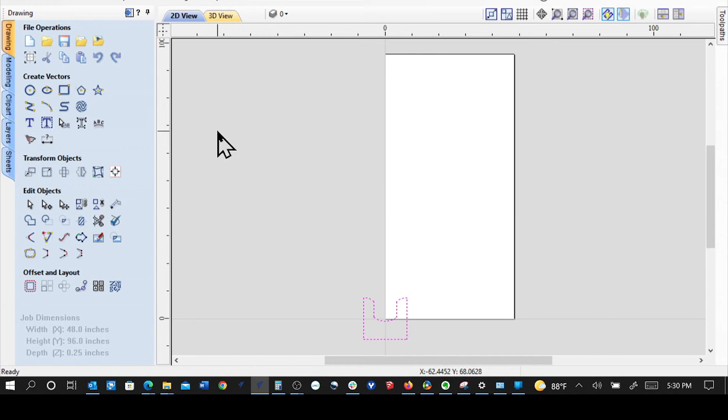Okay, I have a customer that just got his machine, and he imported some DXF parts. Now, these are kind of slip-in dividers, out of 1/4-inch material, and they're going to slide into a 3/4-inch box he's going to make with the SmartBench, with a series of 1/4-inch grooves to let these things slide in.

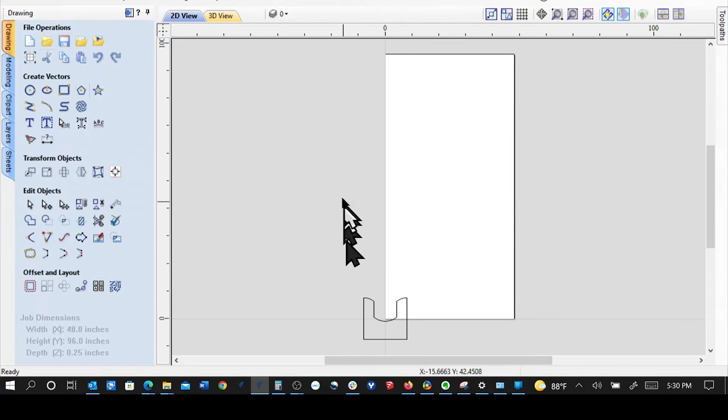So the issue he had is when they came in as a DXF, he couldn't cut them, because the lines are not all joined. The only way to really do that efficiently is to grab them all and go to the join command. Right now there's 8 different open vectors, and after we join them with this tolerance setting, there'll be only one, and that's what we want.

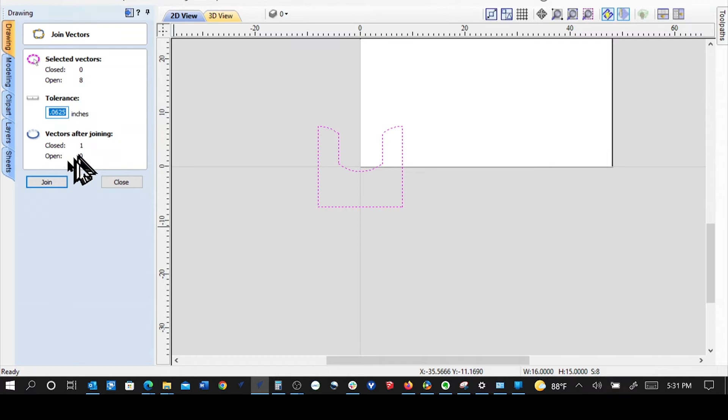Now anywhere I click on that, that's just one piece, so I can nest it. So his question was, how does he do his nesting too? We highlight it, come down here to the nesting icon, and go through our options. I'm assuming he may be using a 1/4-inch bit, but I'm not sure—it's 1/4-inch material. He could be using an 1/8-inch bit and going slow, just knocking it all out in one pass.

Typically what I do is I usually have a 1/2 inch, twice the diameter of the bit or more, so we may have a 1-inch clearance between parts and a border gap of 1.5 inches. That gives me room to screw this down onto my indexing jig that I use. There's a separate video on my YouTube channel—look up indexing jig—and that goes into that little MDF 1/2 inch plate at the end of the table, on one end, and the other end we can do the same thing into the panels.

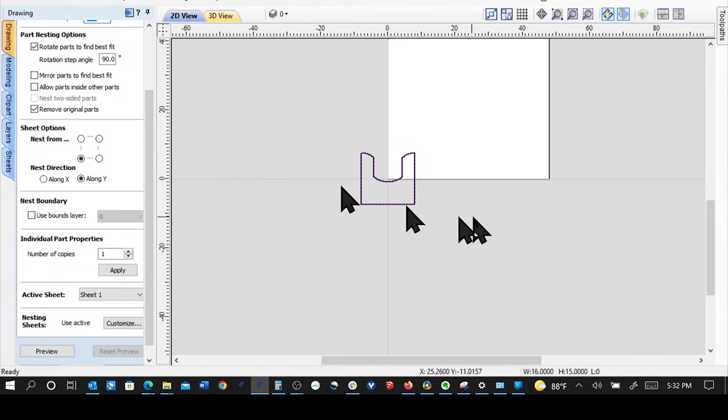So we highlight the part that we want to do, and we tell it how many parts we want to make. Say I want to make 20 of these—I don't know how many slots there were in the side pieces that we're going to look at in a minute. Then you apply it, and it puts that 20 there. If it doesn't put the number of parts there, you've done something wrong. So I'm going to nest and pack it from the bottom left-hand corner here, and I will preview it.

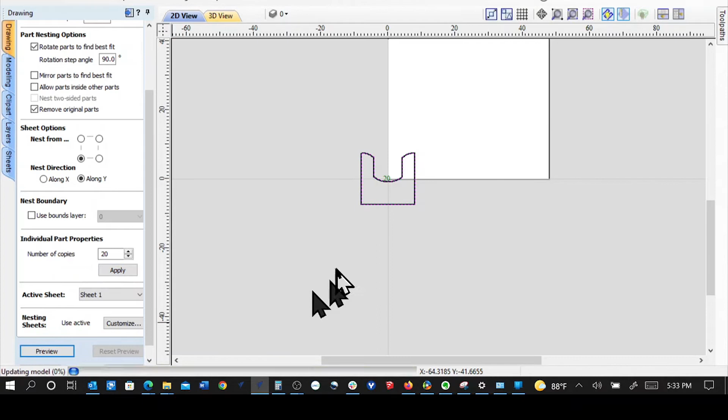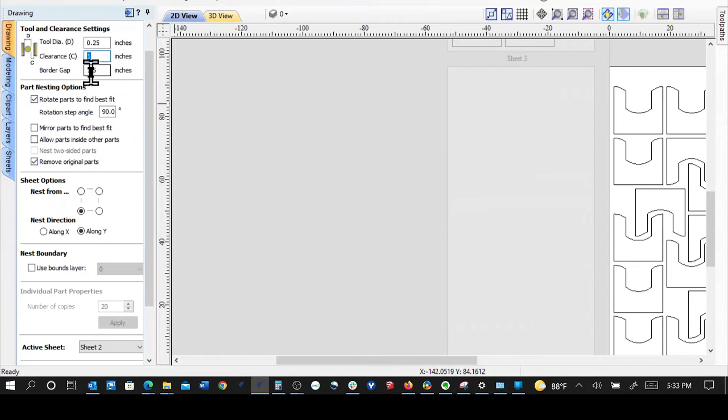So there we go: 1, 2, 3, 4, 5, 6, 7, 8, 9, 10, 11, 12, 13. Well, I think if I pack it a little better, I can probably get another one in, because it looks like it's going to be real close for getting another one up here. So if I change this clearance between parts to 0.5, let's see what that does.

I'm going to do Control Z, which would undo the nesting, but it now has everything selected. Control Z is just a typical undo command. You could also come up to the edit menu and do the undo.

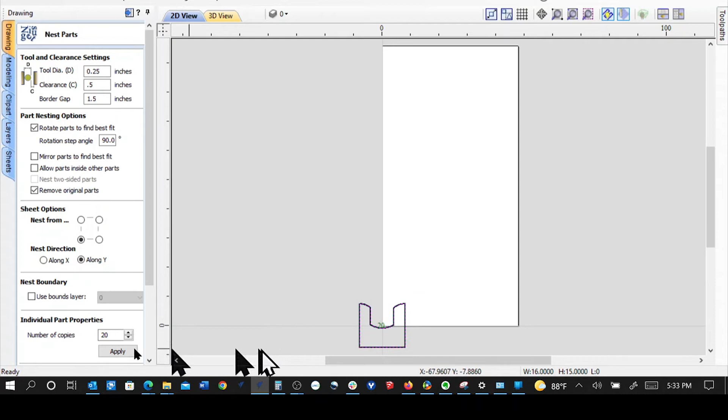So we're going to highlight this again. There's 20 of them that it's going to do, and with a 1/2 inch spacing between, if we preview the parts: 1, 2, 3, 4, 5, 6, 7, 8, 9, 10, 11, 12, 13, 14. So with the shape of this, you can't quite get the second one in there and have it straddle here to here—that's why these are dropped up and down a little bit.

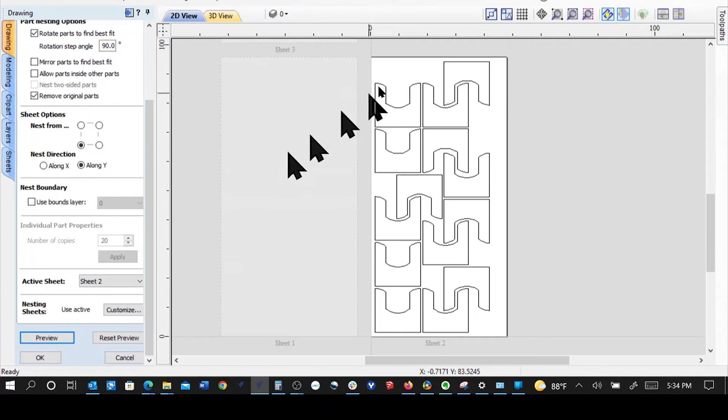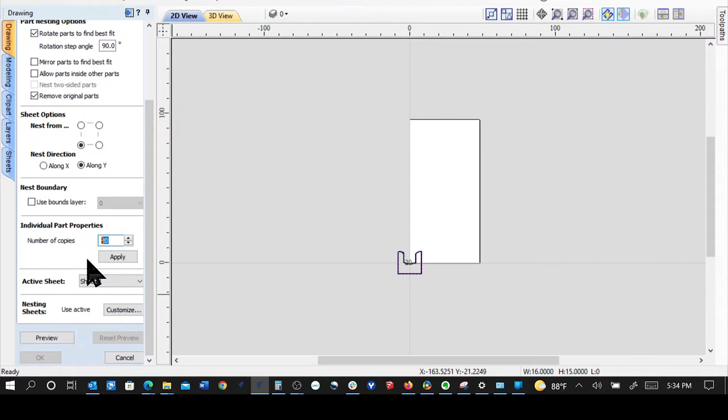I would now re-nest it, just tell it 14. I don't need this extra sheet with the carryovers of the 20 that I told it. So I'll do Control Z to unnest it again, and then this time I'm going to tell it only do 14. That way I'll just have one nice sheet done. And it's showing 14 units, and I'll preview. So there we are, ready to cut.

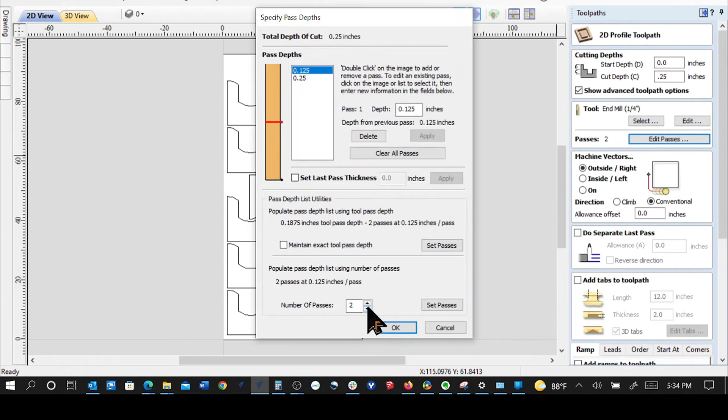Come on over, do the cutting path with the tool. I'm going to go 0.25 deep. Rather than do this in 2 passes, I'm going to do it in 1, just be aggressive, but I may slow my speed down some. I'm going to be on the outside of the path, do a separate last pass. How am I going to hold it? I'll do tabs, and you know how to edit tabs—we'll get into that in another video—and I would want to add ramps in and do that ramp over 3/4 of an inch or so.

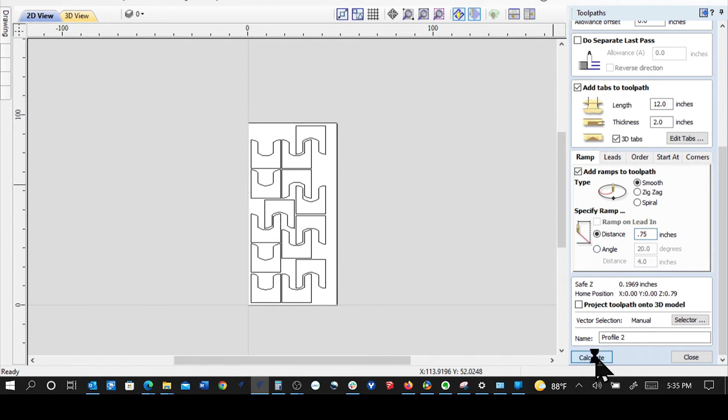We'll calculate. I didn't have anything selected, so grab everything - and no tabs are defined, that's fair, I didn't define any tabs. So there we go with the cutting. We'll reset the preview, preview all, and speed it up. And there's everything. If we have tabs, they would show up too, but we're going to bypass that for now.

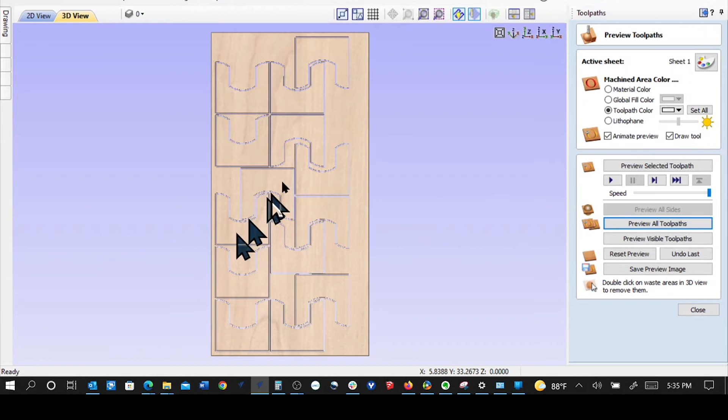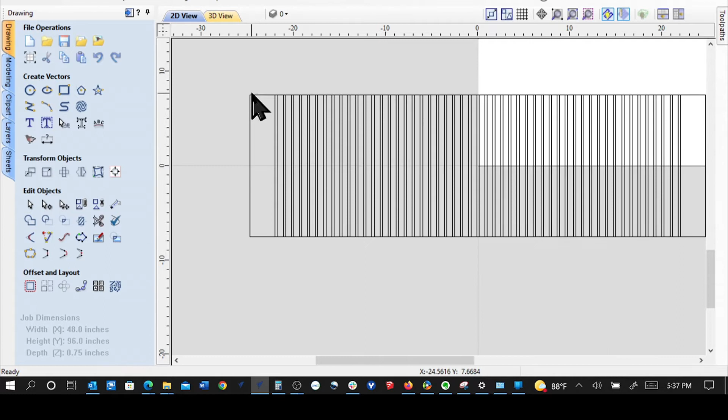The issue we had here is that this DXF he imported is disconnected. So if I wanted to pocket this out, I can't, because it's not a clean individual rectangle. However, I don't want to pocket it out - I want to make one pass with the bit, a 1/4 inch deep, to let those 1/4 inch plywood panels drop in.

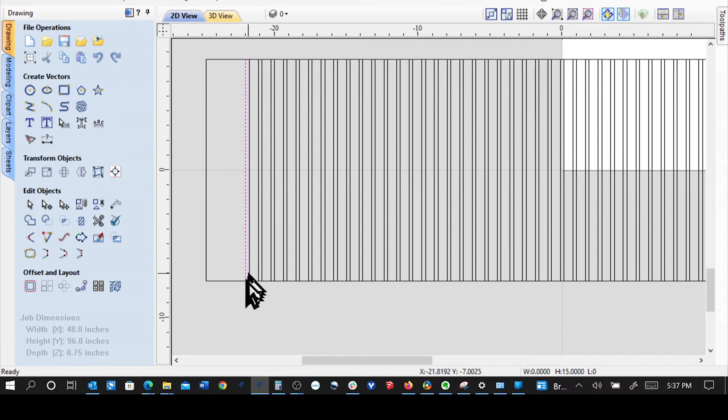So what I want is for the machine to cut one pass - I want it to come up and then down and then up and then down and just go back and forth. But the issue is when you tag multiple lines, you have to tell it whether you want a conventional or a climb cut, and it'll optimize based on that information.

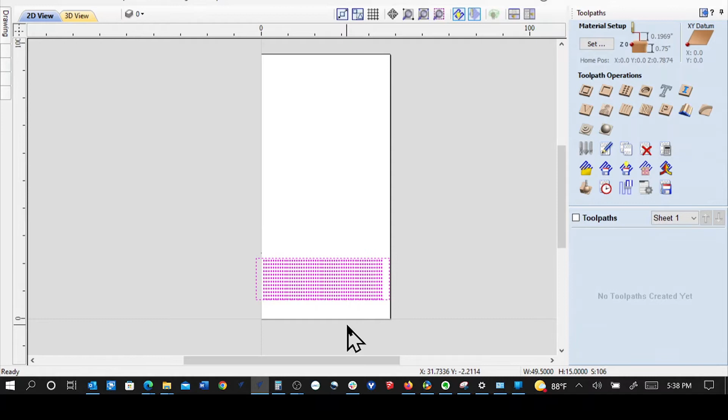I'm going to put this on the material. I just highlighted the whole thing and I'm going to drag it up and put it on the material. Oh, it doesn't fit, so we have to rotate this as well - but I'll just leave it like this for now.

So if I did a profile cut, I'll zoom in and just say make one pass here, holding down the shift key to select more items. We get the idea, and then we're going to do a profile cut. This is a 1/4 inch depth of cut, so I'll just do this in one pass.

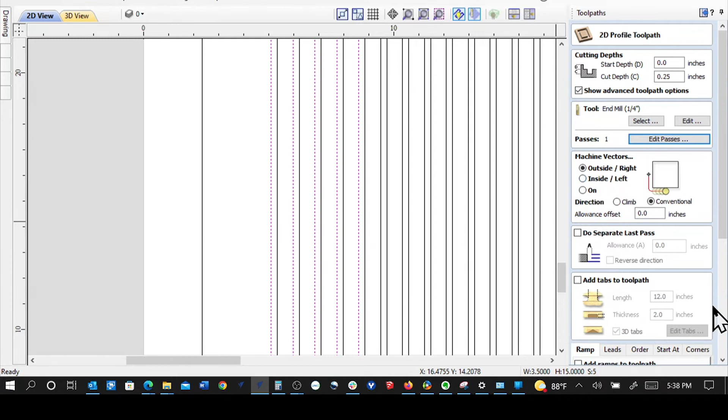I'm going to be outside the line and inside the line, then outside the line again, and I don't need to do any tabs - we'll play with that later. We'll calculate that, and typically I would do a ramp in too, but we're going to look at that as well.

What this will do - it's got open contours. Okay, we can join them. I'm not going to join them - I'm going to keep them as separate individual lines.

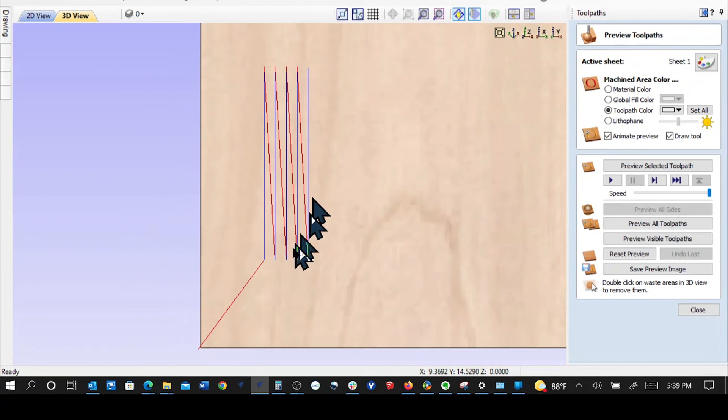But what that's going to do when we look at it is there's too much travel time where it's not cutting. It's going to come in - the red line means it's out in the air, then it goes into the material, the blue line, then out in the air again. So it's traveling the whole length of the dado just to start here and do it. Well, that's not what we want.

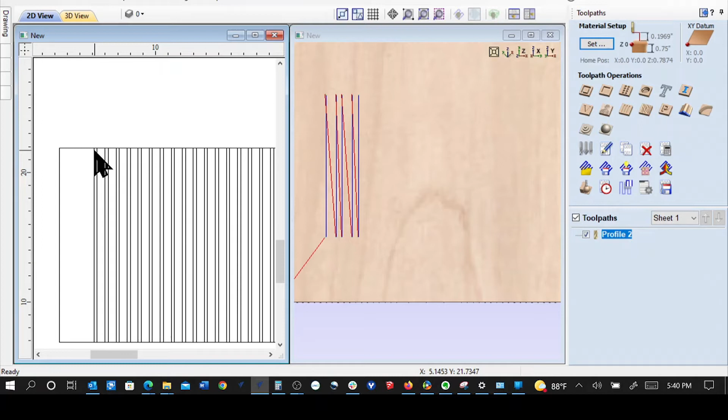So what I'm going to have to do is join these lines with an arc. I want it to come in this way, and I'll draw an arc that comes from this line, from this edge of the line - because this is the tool path where the bit is - and I want to draw an arc that comes around to here.

We're going to go back into our design mode, and this way I don't have to redraw everything from the DXF - I'm just going to clean it up. I'm going to say do an arc from here to here.

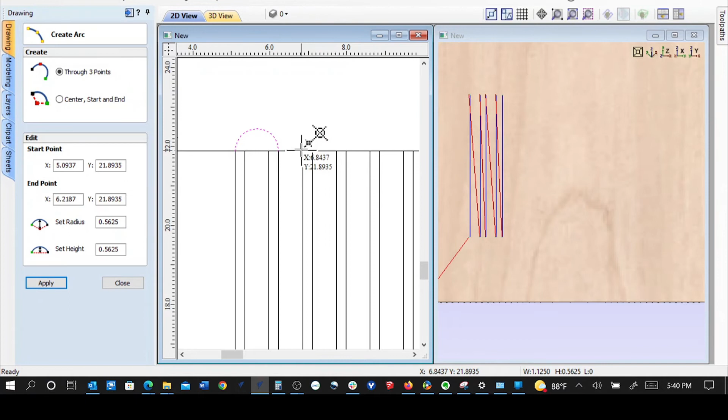I'm going to push it out as far as I can, because my bit - say I'm using a 1/4 inch bit - has to make that swing. I could do this all the way across each of them - oh, missed it, sorry - I could draw them manually all the way across the entire panel, but that'll take a while, so I don't want to do that.

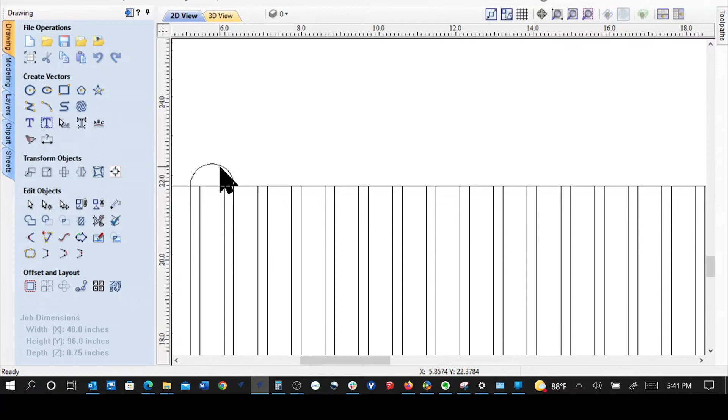I've got 2 in there, so I'm going to take the second one and delete it. We're going to use an array function - I'll take this line and array copy it. What this does is give you the ability to take a vector and multiply it, so you don't have to draw it multiple times.

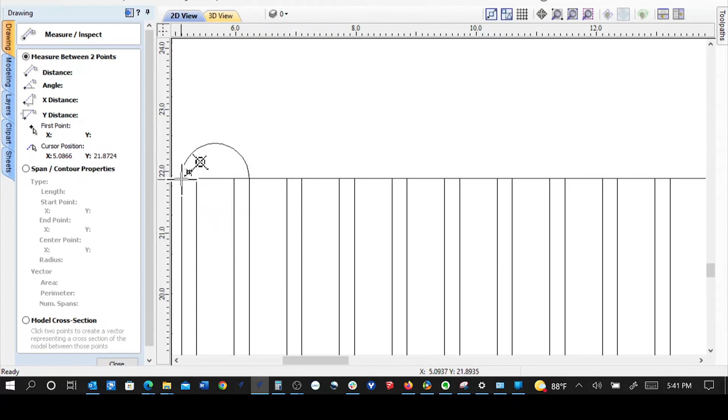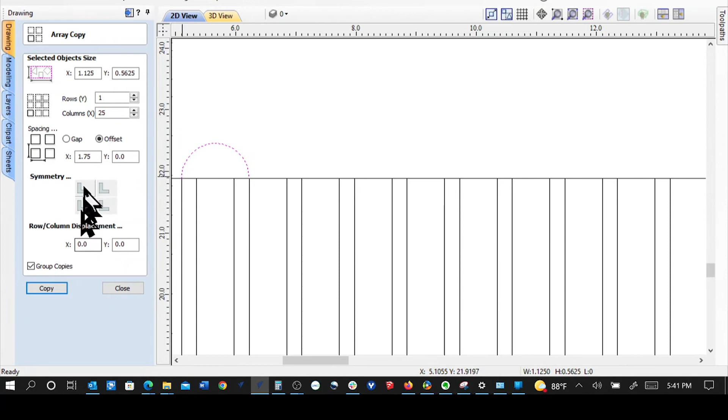I don't know what the spacing is between here and here, so I can measure it using my measuring tool. I'll click, and that was 1.125, an inch and an eighth. So I want to go back to my array, take this geometry, and set the spacing to an inch and an eighth.

That doesn't look right. No, okay, that's just putting them against each other. Sorry, I'm going to undo, Control Z.

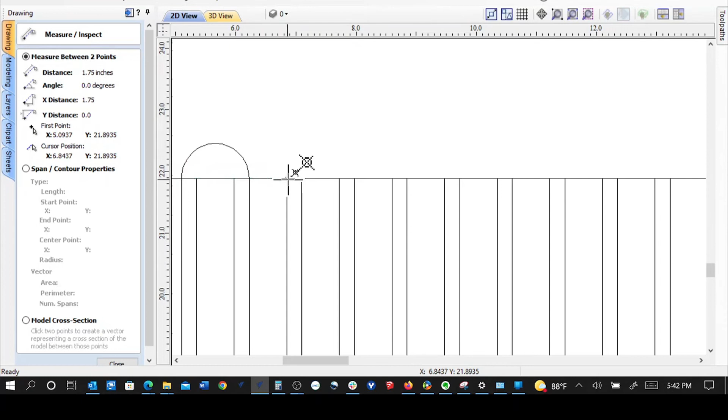So I'm going to measure from where my starting point is now, where I want the starting point of the next one to be. And that's an inch and 3/4. So that's what my array spacing is going to be.

So I'll go back in, grab the array, grab the vector that I want to copy, tell it what I want to do, and switch that to 1.75, and that I only want it to move in the X direction. Don't need any movement in the Y, and I don't know how many I'm going to have, so I'm going to make 20. I'm just ballparking.

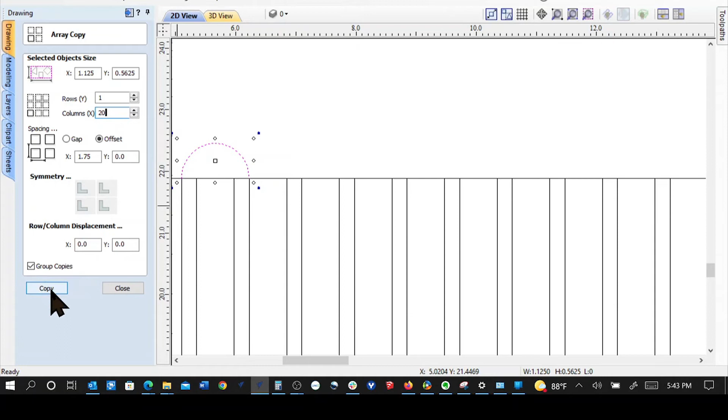I'm not going to count the drawing. It's not worth it. And we'll tell it to copy. That is what I want on this end.

So the tool is going to come up and then down, and there's going to be no wasted space except the time that it's out of the material, but it's going to be at full depth.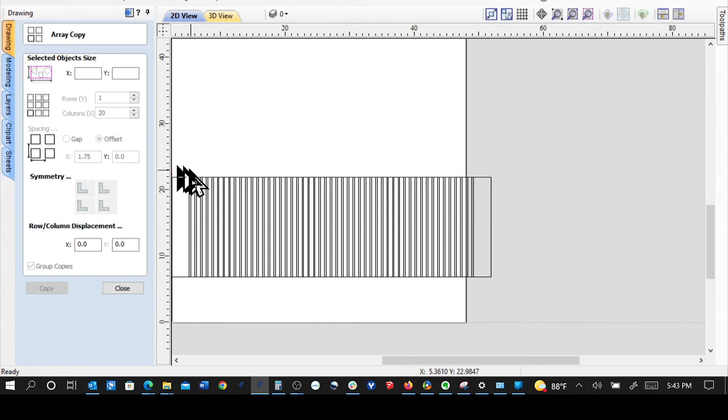So let's look at it and see how many we need. So that's 20. I'm going to do Control Z to undo, and I'm going to tell it this time that I have to select it. 25. And that's got it. So I need 25.

And I'm going to do the same thing on the bottom. Let's see, on the bottom, I have to go the other way because I'm coming in here, down here. So I have to be on this inside. It'll be a different shaped arc.

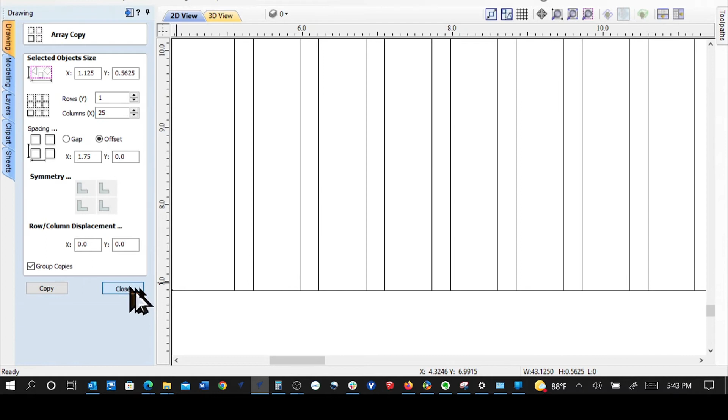So it's going to be tools coming up here, down here. So it's going to connect this and this. I'm just going to drag it out as far as I can.

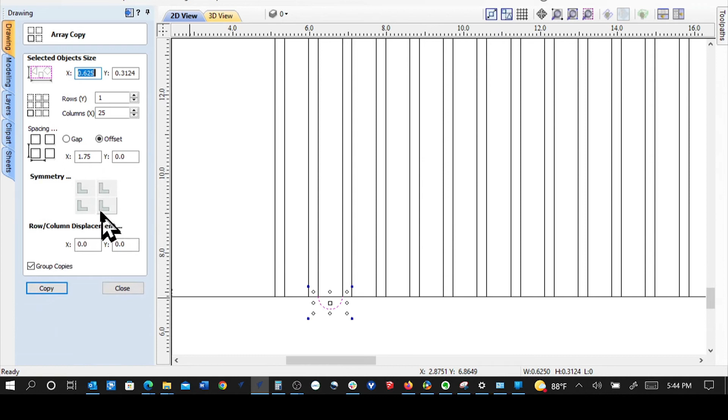And I'm going to array copy that and assume that it's going to have the same spacing, and assuming it's 25, it could be off by 1 or 2. And that looks perfect.

So now the idea is that the bit's going to come in, cut in what's drawn to be a quarter inch. But it's following just this line. It doesn't know where this line is. This line could be gone for that matter. We don't need it, but it came in with the drawing. So it's going to follow this.

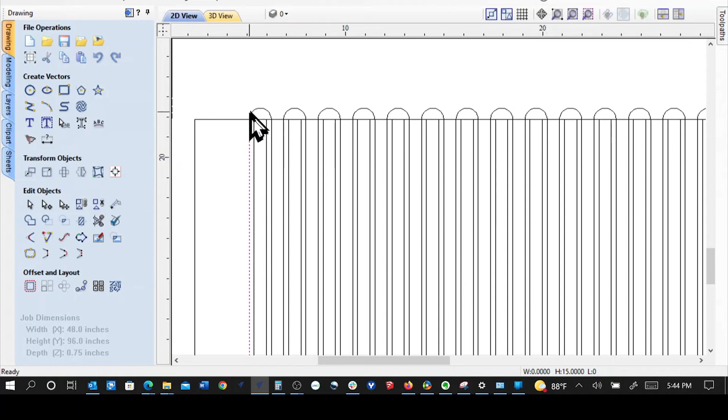It's going to join to this. I'm going to have to do a join command so it doesn't stop there. It's going to be a smooth transition, arc out and come down. When it gets to the bottom of it, it's still following this line, which will be joined to this. It'll just be a continuous loop around. That's how we're going to do it.

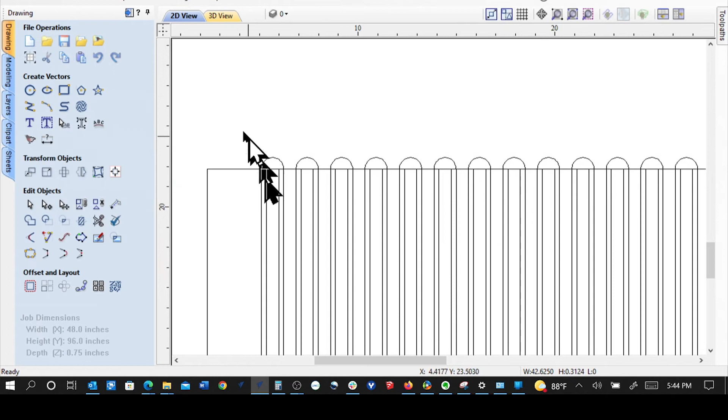That'll work. So how do we do that? We need to now join. I could grab this and join it individually. But I think I'm going to have to just grab them manually.

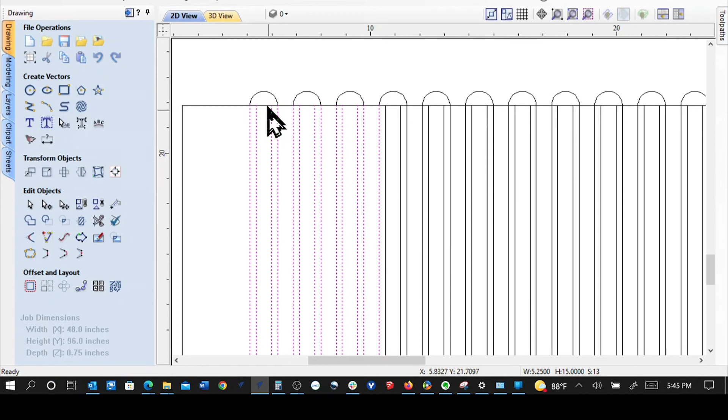Let's see what happens if I grab them all this way. Because these won't match. They won't find each other. They're too far away from the end. So let's see what that does.

So I need that and this. I need this. This. Why is it not auto selected? And then if we join...

Interesting. So we have a problem with the array.

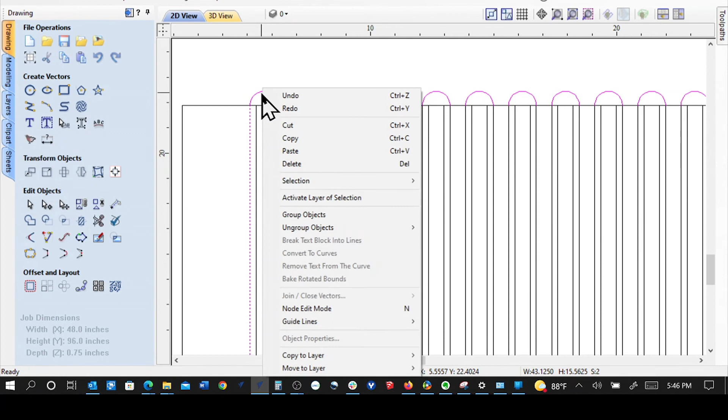Okay, and then when we go to join them, we may have problems. There's different ways to do this. When I grab one of them, it's grabbing all the ones that were similar in that array.

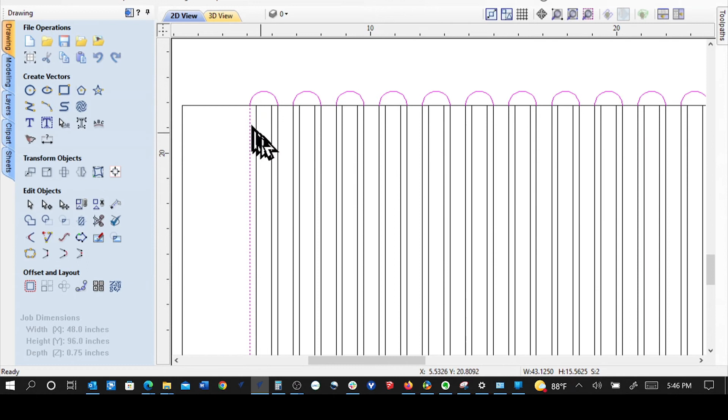So when I copied it over as an array, I had told it to group the copies. We don't want to do that because now I can't just grab all these lines. It unselects the array. I can't use the join command that way. It won't let me. It doesn't give me an option to try to join.

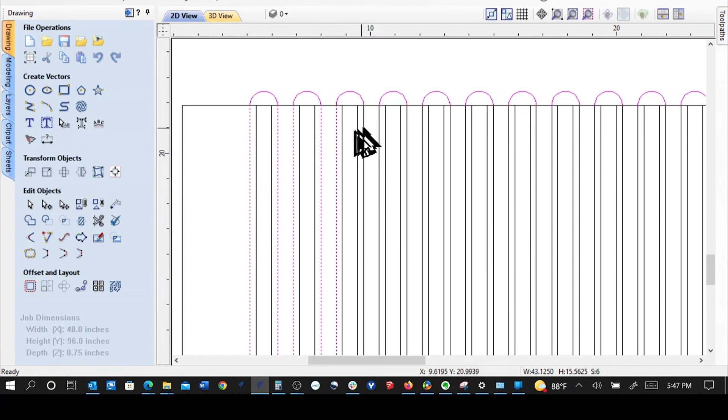But if I hold down the shift key and manually select them, I can do it that way. And then I just have to grab the proper lines. And then I can join them. No, I can't.

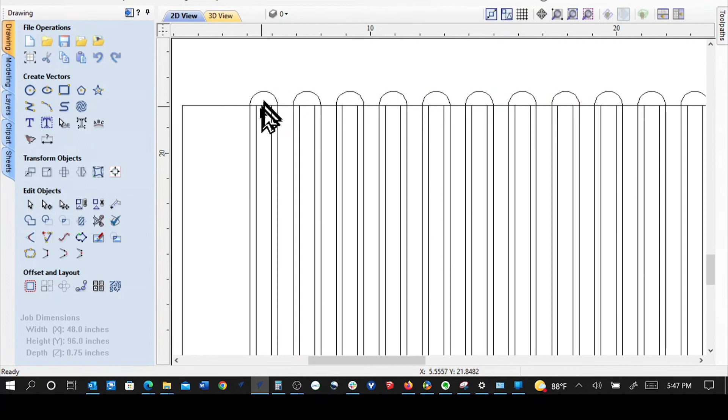So you have to ungroup these. I'm going to right click and ungroup the objects back to the original layers. Now they're all individuals. So now I can say I want to take, I don't need to do them all right now. Take this and manually grab the proper lines.

Holding down the shift key to multi-select, and then I'm going to join them. And there we are.

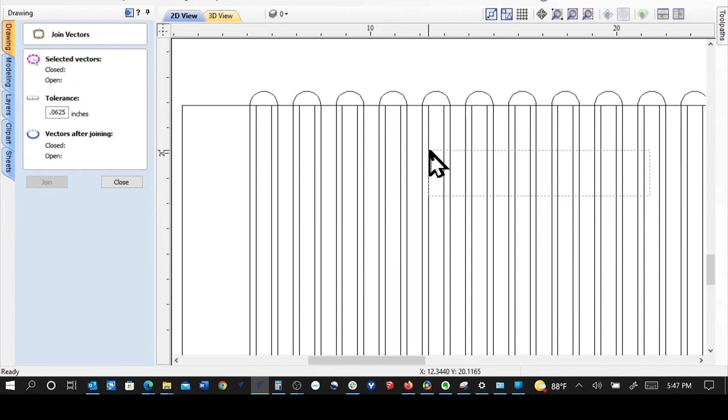And now when I touch this line, it follows all the way down, and I have to do the lower ones too. So what happens if I just try to auto-grab stuff? Now that I've ungrouped them, I can grab all of these, both lines, even the line that's not going to be able to join because it's too far away.

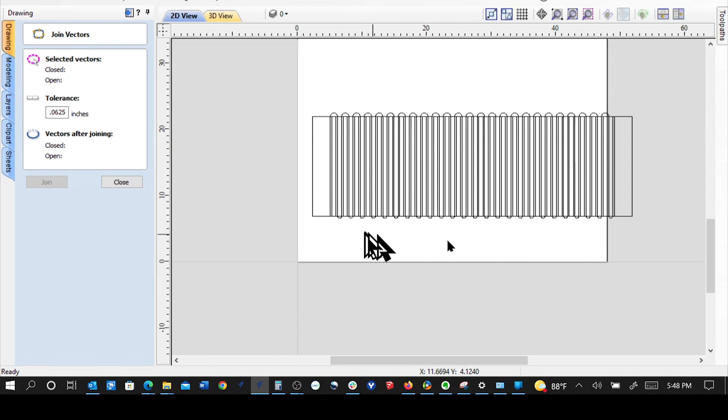Because these lines aren't going to be close enough to join in the tolerance, they're just not there. Then this still works, and now that's nice and quick. Once we do the bottom, we'll be good to go. So I can highlight, grab all the bottom ones, and turn off their grouping.

I'm going to ungroup them. Then I'm just going to grab everything. That should work.

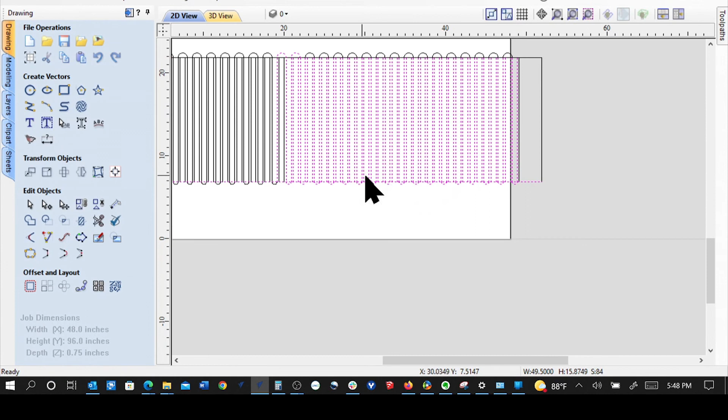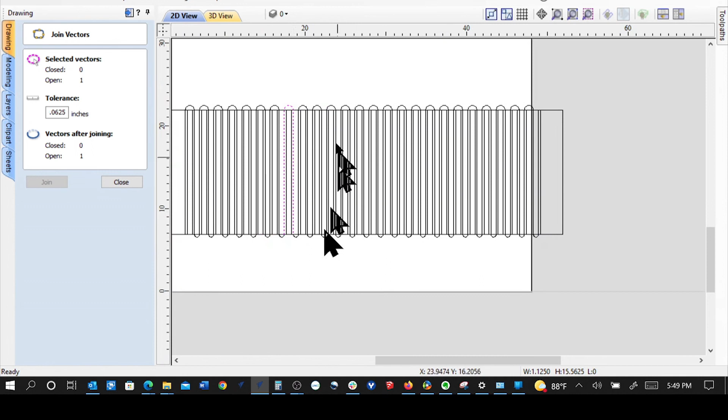And go to the join command, join them. Now, when I grab that, it works. And as we get closer to here, it'll work as well. But I don't know how far I grabbed in, so I'm just testing the technique.

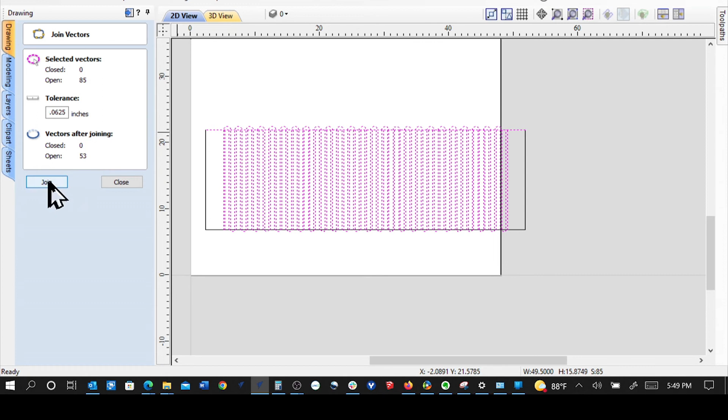If I grab everything on the lower end, I'm going to join them. Everything on the upper end, I'm going to join them. Now I should have continuous lines. So that's a real quick way to do it.

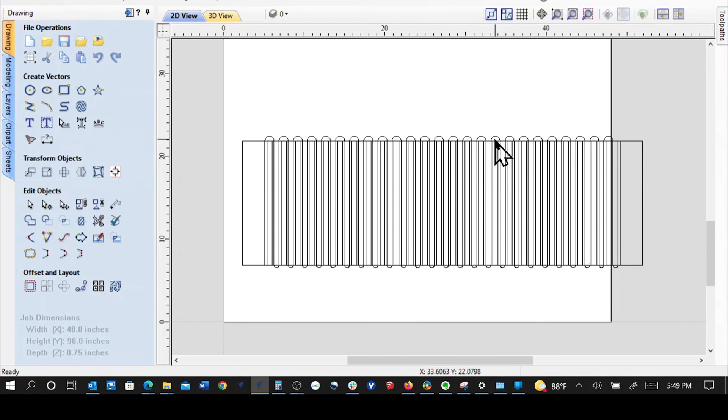Connect it with the arcs. Give enough room for the bit to work its way in, and then it's on the outside of this arc. And then ungroup everything so that each of these - they're now connected because I joined them - so each of these arcs is separate.

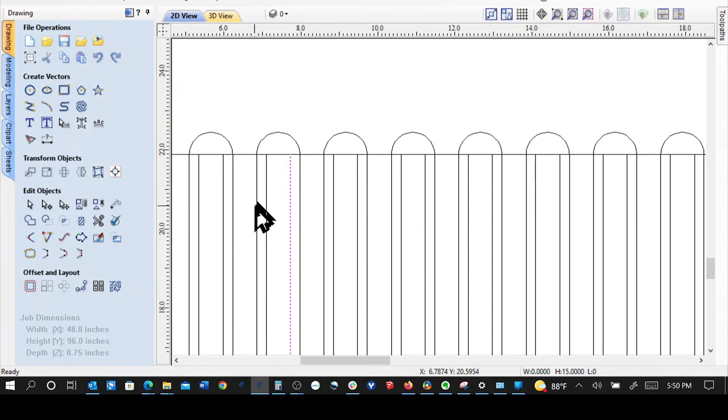And then I can multi-select everything. Because it would join these since they're tight enough inside that tolerance level that we set with the join command, but it disregards this line and this line because they're too far away. So it just disregarded them. It's only actually working on this.

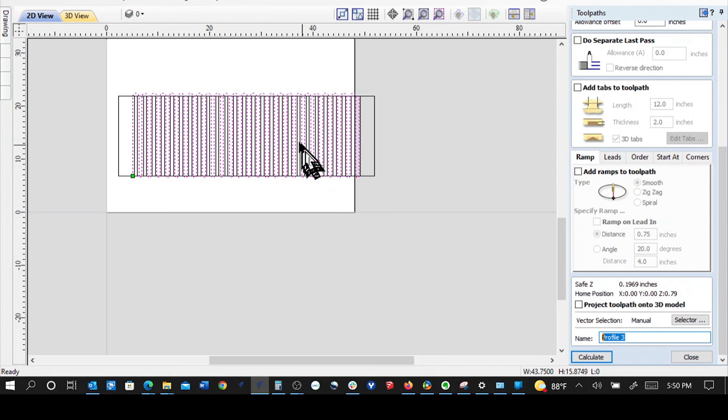And then when we machine it, we grab our tool, we're going a quarter inch deep. We're only going to do it in one pass. And this will be just a profile. And we'll let that go. We'll calculate it, and it'll be one continuous, nice setup.

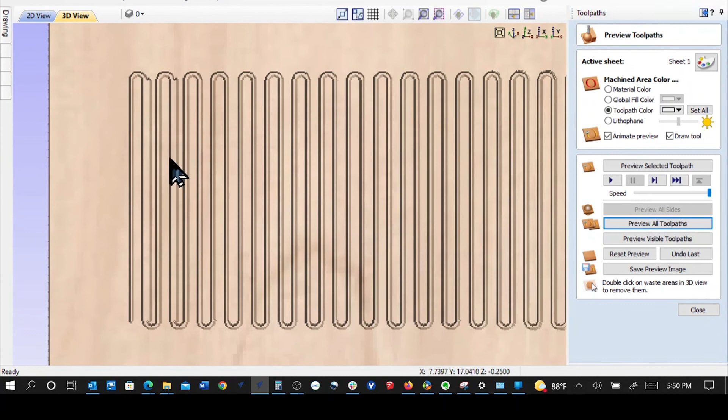So I'll have to reset the preview and then preview all. And again, the first ones may have been boogered a little bit because of all the different things that I did, but that's the process that we want to do - showing all this and selecting different lines. But now it's just a continuous snake.

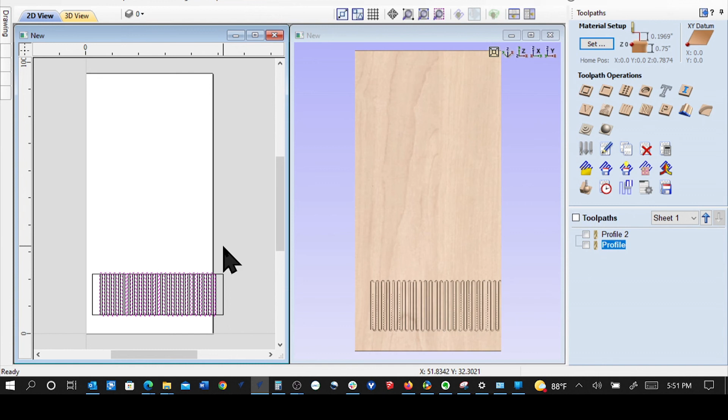Now we have to rotate things. Again, this panel doesn't fit on the sheet. It's wider than a 48 by 96 sheet is wide, so we're going to come back in, and I want to show how to rotate something.

I'm going to take it and rotate it 90 degrees and apply it. I can manually grab it and place it where I want, or I can just tell it to nest it.

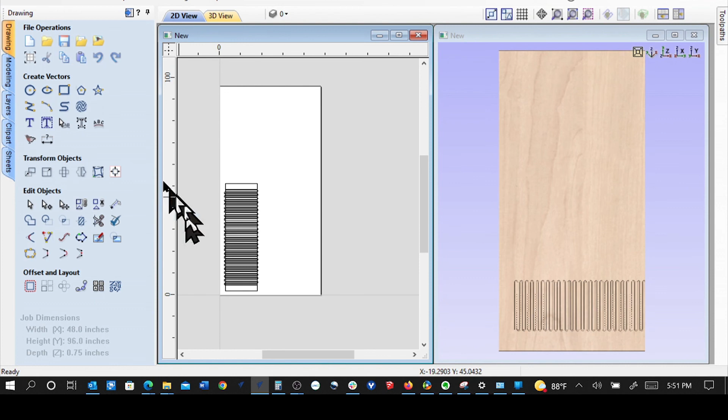But I will now go back in and recalculate. I don't need this one - this was the one that was already there. I'm going to delete that. That's what had the extra lines in the beginning. I'll recalculate everything - it spins everything.

I'm going to go in and preview it, and slow it down a little bit, and preview all. And it just starts and does its magic.

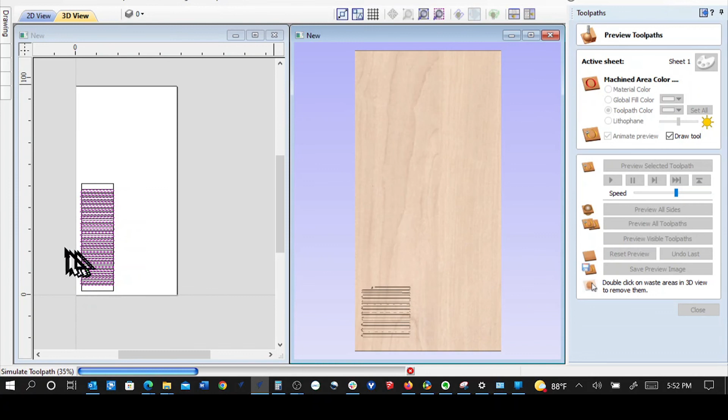Now, you can set this where it has no side margin. I can manually nest it. I can see that two of them, if they're not going to fit across it, aren't going to fit going up and down either.

But I don't know the size of this. We maybe will fit three of them side by side. I'm not sure. I'll look at that in a moment, but this is how we're going to do this.

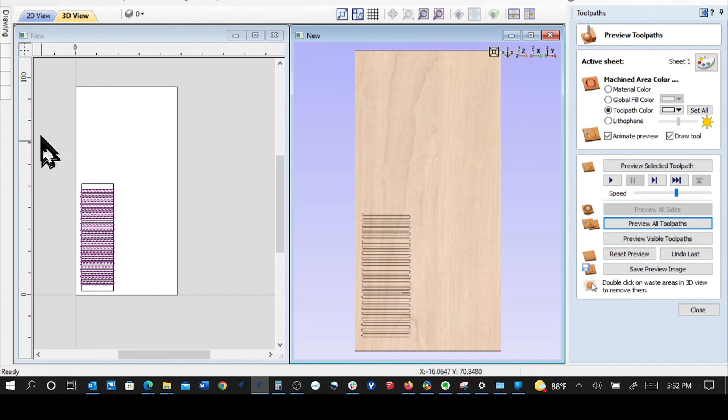And then I can just either copy that by doing - I'm going to cancel the simulation - but I can either grab the whole thing and do Control-C to copy it. That makes a copy in the air, and then Control-V puts the copy on the table. And then I'm going to drag it over.

And then now, when I go back to look at my profile lines, it's only doing that one. So I'm going to zoom in a bit and tell it to do this one as well, and hold down the Shift key to make sure I have both of them. And now I can calculate it.

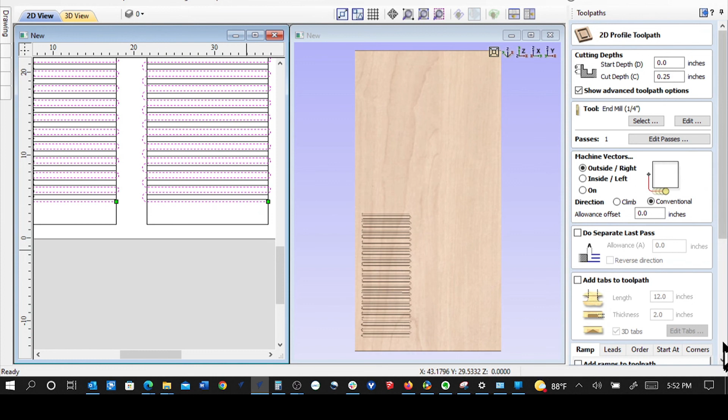It's going to clean it up a little bit, and we'll do the regular cutouts for the profile out here. This is mainly showing how to get this thing to cut efficiently with the geometry that was given in the DXF file. That's a nice clean toolpath.